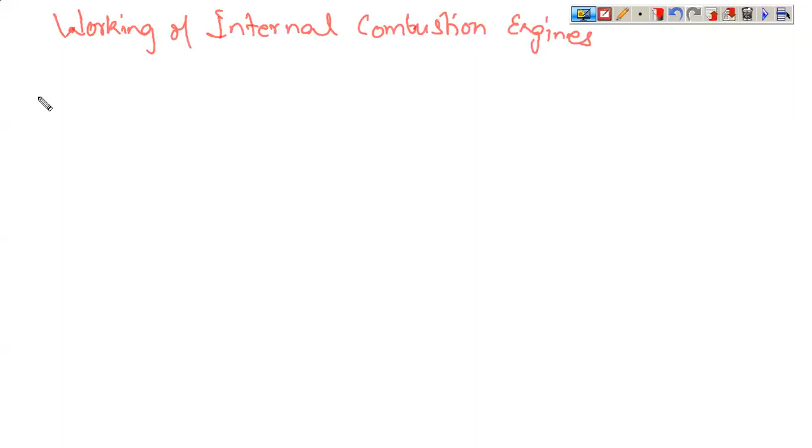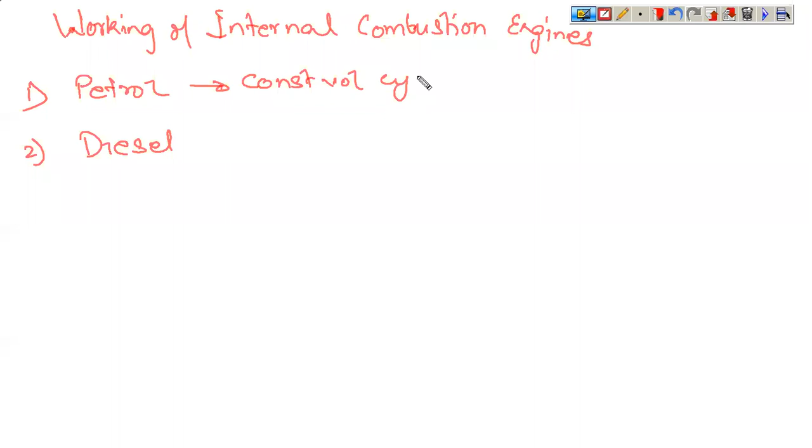Under the classification head, we had studied that there are two types of engines, petrol engine and diesel engine. The petrol engine was supposed to follow the constant volume cycle, and this is known as Otto cycle. Whereas a diesel engine was supposed to follow constant pressure cycle, and this is called as diesel cycle.

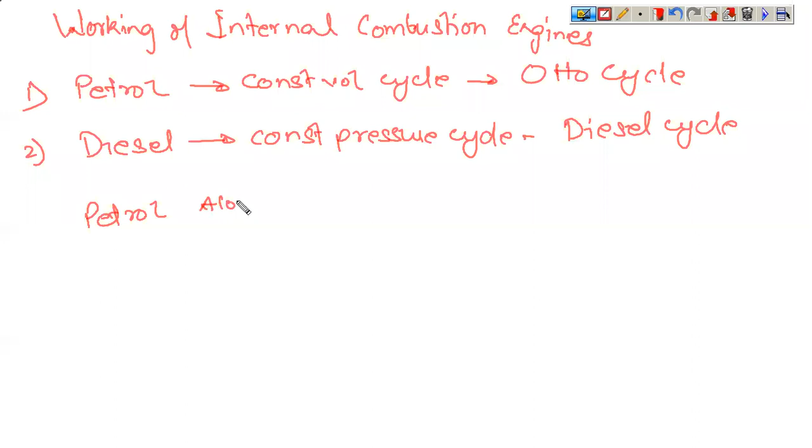Now for petrol engines, they are either petrol alone as the basic fuel, or you have a combination of petrol plus CNG, or petrol plus LPG. These are two basic fuels. And for diesel, we have a single diesel engine. Diesel cannot run on two fuels.

A vehicle running on diesel cannot accommodate two fuels. The primary reason is CNG and LPG follow gas cycles, and these gas cycles are based on Otto cycle only. So with a slight modification in the engine parameters, a petrol engine can be converted into a combination of petrol and CNG or a combination of petrol and LPG.

Whereas a diesel cycle or constant pressure cycle is entirely different from a petrol cycle. The basic mechanism or functioning itself is different. So a diesel engine cannot be modified into a CNG or LPG engine. Another thing you can ask is, what if we put diesel into a petrol engine?

If diesel is used as a fuel in a petrol engine, it will not run the engine, because there is a difference in ignition temperature of petrol and diesel, as well as the basic flammability of petrol and diesel. There is a huge difference, and that difference cannot be accommodated in a petrol engine.

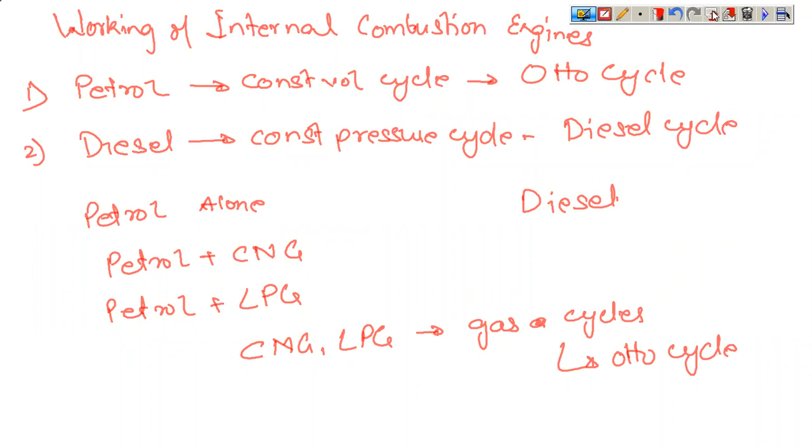So if you talk about petrol engine, let us first take a petrol engine. Petrol engines are called SI engines. SI means spark ignition - these are classifications of petrol engine. Under the classifications, I had told you about SI and CI engines. So SI is spark ignition engines, and diesel engines are called CI engines - compression ignition engines.

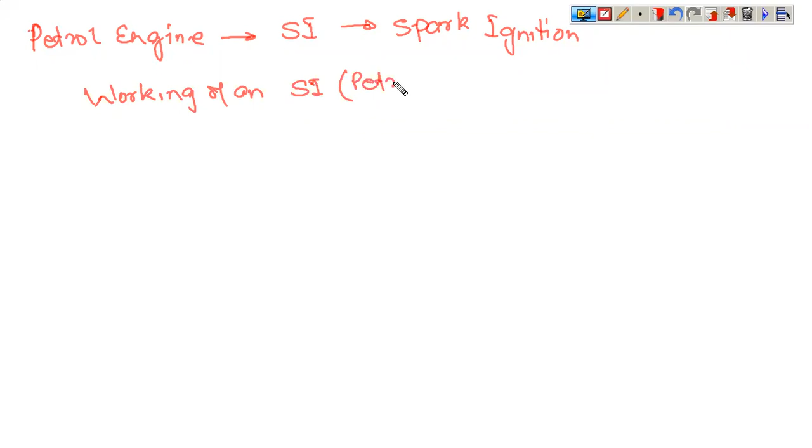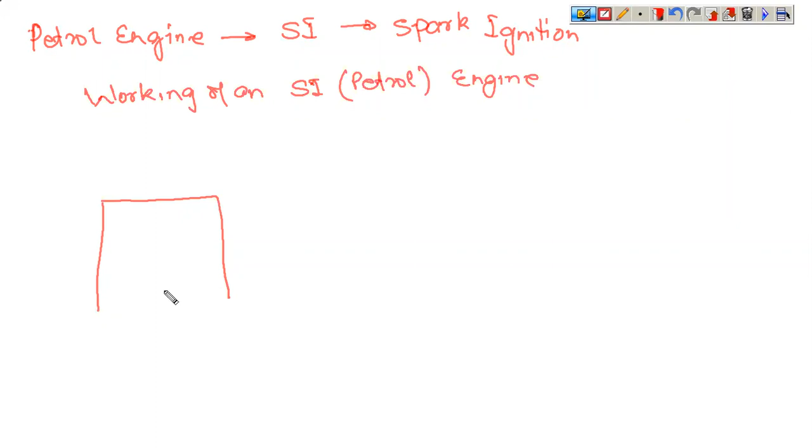So let us first see how a petrol engine works - the working of an SI engine. If you say SI engine or a petrol engine, it is one and the same. So here you have a piston, this is a cylinder, this is a piston. And you have a mixing device located outside the piston cylinder assembly where air and fuel is mixed in a definite proportion and it enters into it.

So through this air fuel mixture in a definite proportion, it enters here, and the piston starts moving upward. Before the piston starts moving upward, this entire volume, or the cc of the engine, is filled up with air fuel mixture. And the piston, when it starts moving, starts compressing the air fuel mixture or gas present inside it.

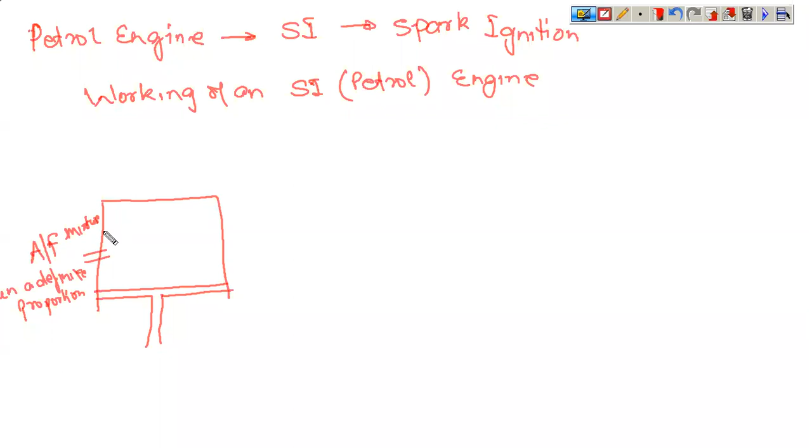So after compression, let us say the piston has reached here. It cannot reach the top of the cylinder because then the volume will be zero - that is not possible because there is some volume, it will occupy some space. So due to this compression, the temperature of the air fuel mixture rises to a certain extent.

At that moment of time, you have a spark plug placed here. A spark is ignited, which leads to the burning of the fuel. Again, you can ask, why didn't we compress it to such an extent that it burnt on its own? If it burns on its own, there will be a sudden burst of energy.

So, to make the combustion controllable, we increase the temperature to a range where it is just about to burn, and the final process of burning or combustion of the fuel takes place with the help of the spark plug.

The spark plug delivers the difference of temperature required to burn the air fuel mixture.

Now, after burning, what will happen? It leads to burning of the air fuel mixture. The petrol gets burnt in the presence of air, and due to burning, the gases will expand, and the expansion of the gases...

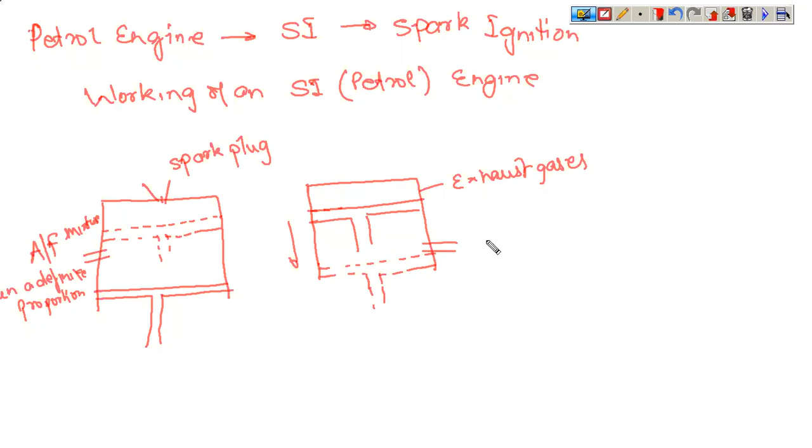after burning, it leads to the piston which was initially here, it is pushed down and it reaches here. Now this entire volume is filled by exhaust gases, and you have an outlet mechanism here which allows the gases to leave the system.

It allows the gases to leave the system, and again a fresh supply of air fuel mixture will enter into it and the process continues. Now the energy required to move the piston up is given by the engine, and this is the expansion stroke where the expansion of gases leads to the pushing of the cylinder piston from the upper end to the lower end, and this is your work output that you get.

Now this work output is sent to the flywheel where it stores energy and delivers it as and when required, which is also useful in running the engine. So this is your complete cycle through which a petrol engine undergoes.

So if you see here, as I told you, there are four processes involved in the working of any IC engine. First is compression, second is heat addition, third is expansion, and the fourth is exhaust. These four processes need to be accomplished so that an engine starts producing power.

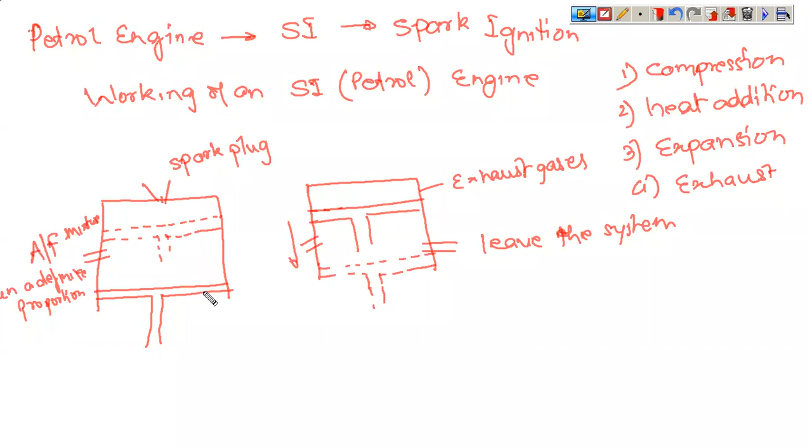So when the piston is moving, the lower part is called bottom dead center, BDC. Why is it called bottom dead center? Because the piston cannot go further below it, and there is a restriction that the piston will not go further below it. So this is called a bottom dead center.

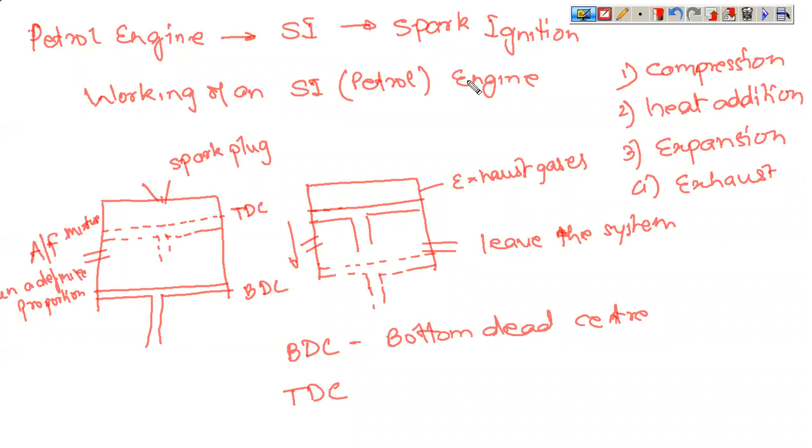This point is called TDC, top dead center. Why is it called top dead center? Because the piston cannot go further above it.

This much amount of volume will be left because this much amount of volume corresponds to a certain pressure, which also corresponds to a certain temperature, which is being reached here. So you need to understand that these are the uppermost and the bottommost positions of the piston.

So in the cylinder, when the piston is moving from here to here, what actually happens is the first process, compression, takes place. Here when the spark is ignited or applied, this is the heat addition, where heat has been added due to burning of fuel, and the burning of fuel takes place.

Now after the fuel has been burned, the gases expand, and the expansion of the gases is the third process, wherein the piston is moved from the topmost position to the bottommost position. And the last one is exhaust, where exhaust gases leave the system from the silencer and are taken out, and a fresh stock of air fuel mixture enters, which allows the cycle to be completed again and again.

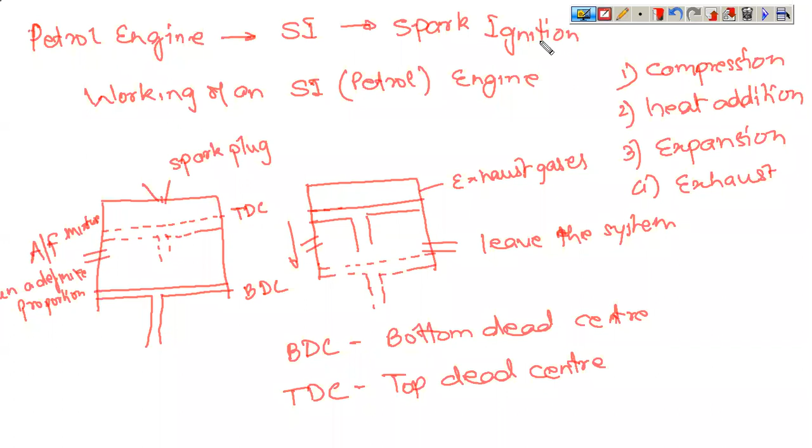Now the next is diesel engines. These are also called compression ignition engines. So in compression ignition engines, what happens is you again have a piston and cylinder arrangement.

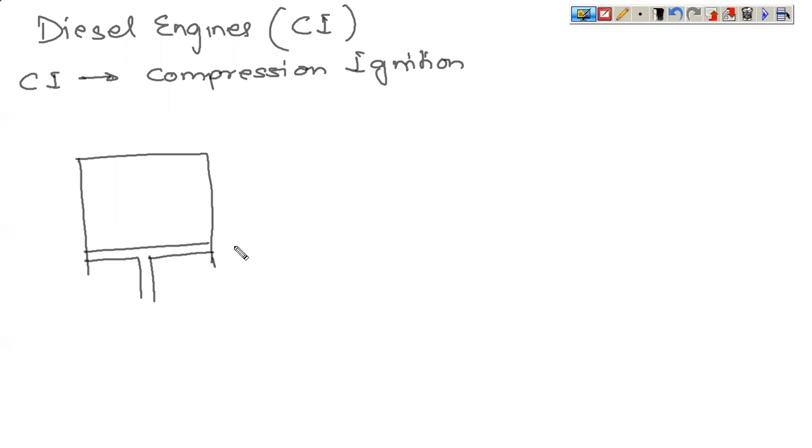So this is the initial position of the piston inside the cylinder. This initial position is called BDC, bottom dead center, below which the piston cannot move.

Now here only air is sucked into the cylinder, and this entire volume is now filled. Let us say it is a 100 cc engine, then this entire volume of 100 cc is filled with air only.

Air that is sucked from the atmosphere passes through a filter where the air is purified of dust particles, sand particles, etc., before it enters into the cylinder, because sand particles will corrode the inner surface of the cylinder. So only air is being sucked into the cylinder, and then the piston starts moving upward.

So air is compressed and the piston reaches here.

This is called top dead center, or TDC. Now this volume comprises only air, which after compression has achieved a higher pressure and temperature.

The amount of compression in a diesel engine is more than in a petrol engine. In diesel, air is compressed to a larger extent. The compression ratio is around 8 to 12 in SI engines, meaning it's compressed to 8 to 12 times the initial volume. In diesel engines, it's around 20 to 25 times. So the volume left over will be smaller compared to a petrol engine.

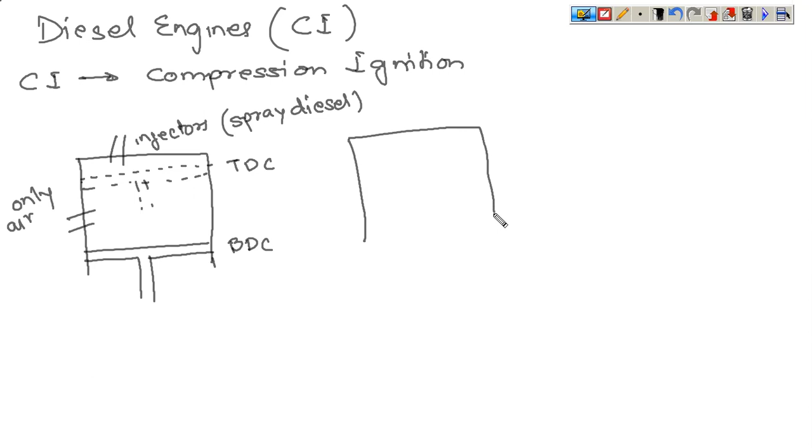This is heat addition. After heat addition, the gases expand. This was the initial position of the piston at the time of burning, and the expansion of gases pushes the piston from its topmost position to its bottommost position.

This is now entirely filled with exhaust gases, and exhaust takes place, removing the gases from the system, completing the entire cycle. In the next cycle, fresh air stock enters the cylinder, gets compressed, diesel is sprayed onto it, leading to burning of the diesel.

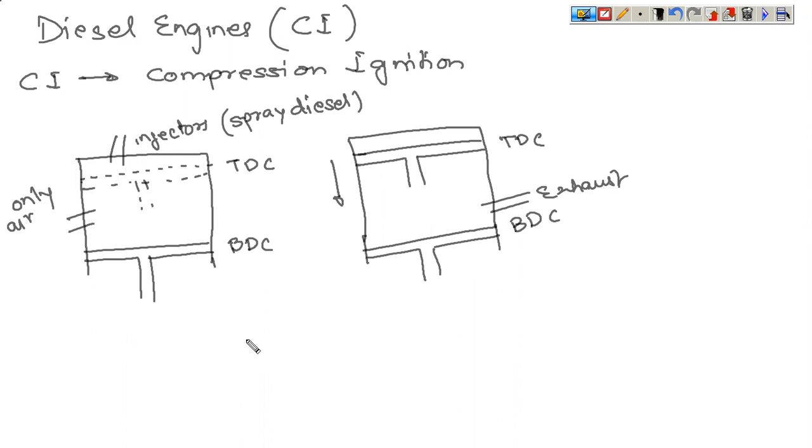The burning of diesel expands the gases, and this expansion pushes the piston from top dead center to bottom dead center. This pushing of the piston from TDC to BDC is the power stroke, and this power is utilized to run the vehicle. Now, again, this is a constant pressure cycle.

It is a constant pressure cycle. When the piston is at this position, it is filled with high temperature, high pressure air. Now when diesel is sprayed onto it, if the volume remains constant, the pressure will increase because you have a limited volume and more matter is being inserted into it.

So when the diesel spray takes place, the piston moves down by a very small amount so as to keep the pressure constant. This is the reason why it is called a constant pressure cycle.

In a petrol engine, the position of the piston was constant when burning takes place. Whereas in a diesel engine, the position of the piston is not constant - it moves down, increasing the volume by a small amount as diesel is sprayed into the cylinder. This is why it is called a constant pressure cycle, also known as the diesel cycle.

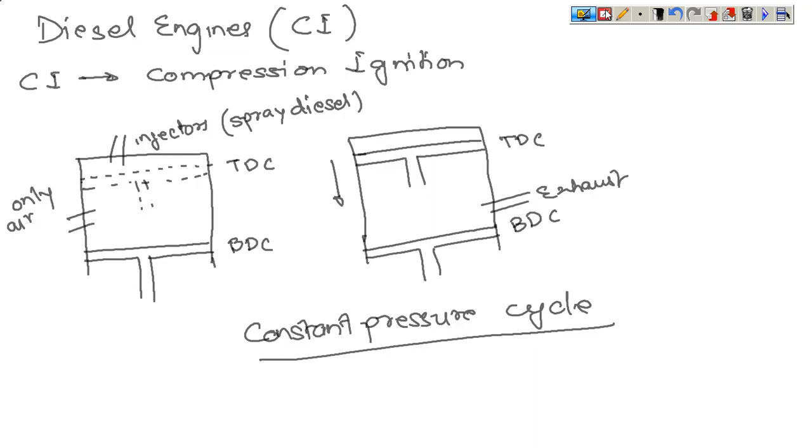Now, two-stroke and four-stroke engines can be petrol engines or diesel engines. Why are they called two-stroke and four-stroke engines?

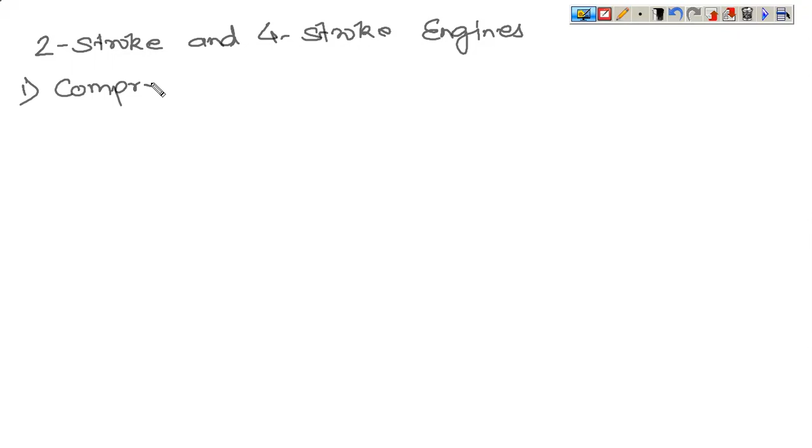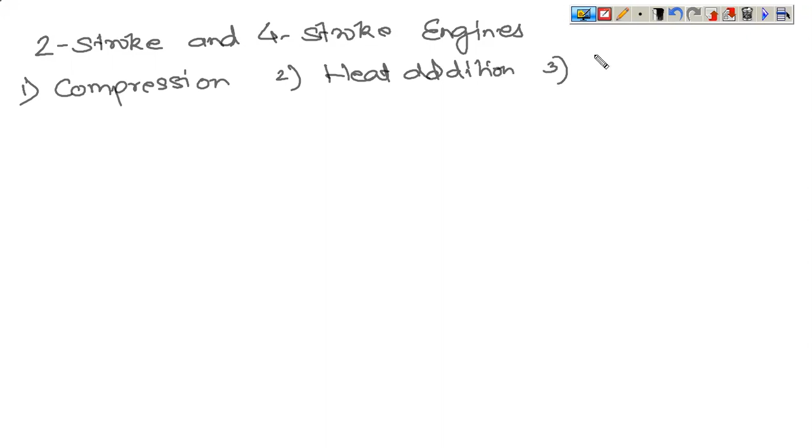Before I start, you can see there are four basic processes: first is compression, second is heat addition, third is expansion, and the fourth is exhaust. These four have to take place in this order only so that one cycle is completed.

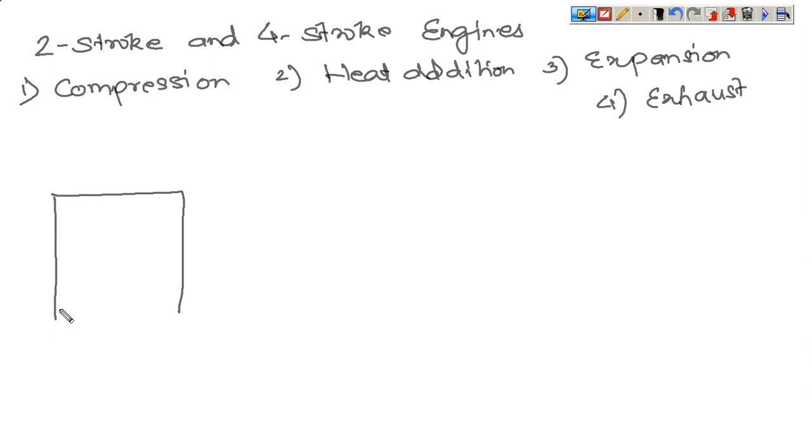So in a two-stroke engine, what happens? This is a cylinder and you have a piston here. Now you have a port here, called a port, meaning an opening - this is called an inlet port. Through the inlet port, air-fuel mixture enters, and as entry takes place, the piston starts moving upward, reaching its final position here.

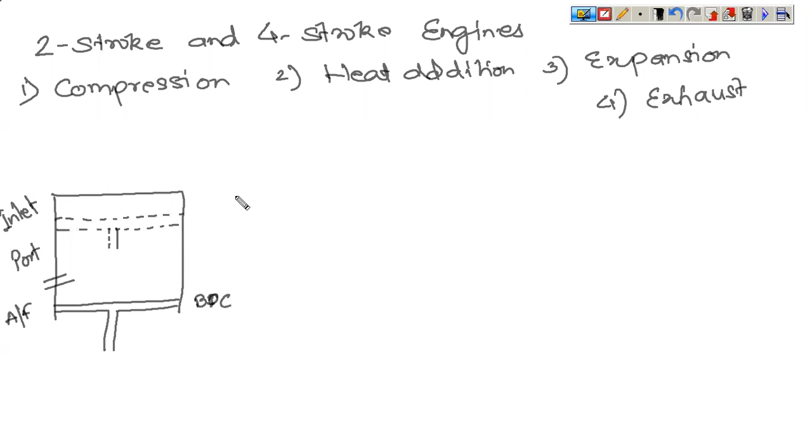So this is one stroke. One stroke means one stroke is the movement of the piston from BDC to TDC. So BDC, this is your first stroke, stroke number one. In stroke number one, the piston moves from BDC to TDC, thereby compressing the air fuel mixture.

If it is a petrol engine, or if it is a diesel engine, it will compress the air to this extent. Whatever the engine is, the working principle for a two-stroke engine is the same: the piston moves from BDC to TDC, either compressing the air fuel mixture or compressing the air, depending on whether it is a petrol engine or a diesel engine. This is your one stroke.

Here, heat addition takes place. In this heat addition, what happens? Either a spark is initiated to burn the air fuel mixture, or diesel is sprayed onto it so that the fuel burns, and the burning of the fuel leads to the production of heat.

That is heat addition. After heat addition has taken place, this is your second stroke. So in the second stroke, what happens? This is your initial position of the piston, and this is after heat addition has taken place. After heat addition, the gases will expand and push the piston from TDC to BDC, this location.

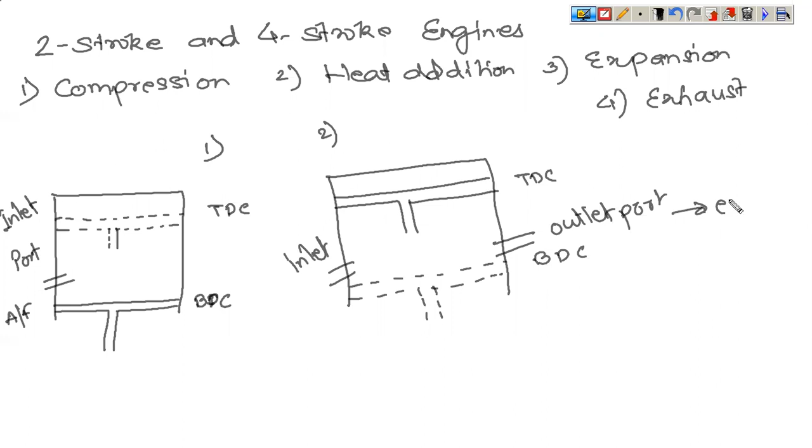So this is your BDC. It has been pushed - this is your expansion. And again you have an outlet port here, and an inlet port here. So from the outlet port, the exhaust gases leave the system, and simultaneously fresh gases enter into the system.

So what happens? The energy required to run this system - one motion of the piston is given by you, and while it comes down, the piston gives back energy which is used to run the vehicle, as well as supply energy to the piston to again perform compression. So this is a two-stroke engine.

A two-stroke engine means one upward and downward movement of the piston inside the cylinder. In the case of two-stroke engines, you have two ports: inlet port and outlet port. Through the inlet port, air fuel mixture or air, whatever is applicable, enters into the cylinder. Through the outlet port, exhaust gases leave the system.

If you see the system, both the ports are open at the same time. So what will happen? There is a possibility that some amount of unburnt air fuel mixture leaves through the exhaust port. There is also a possibility that some amount of exhaust gases stay back in the system and are further compressed. It is a wastage of energy.

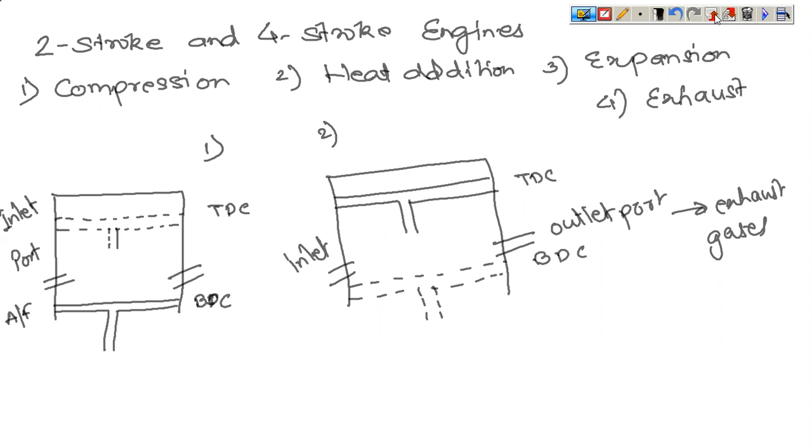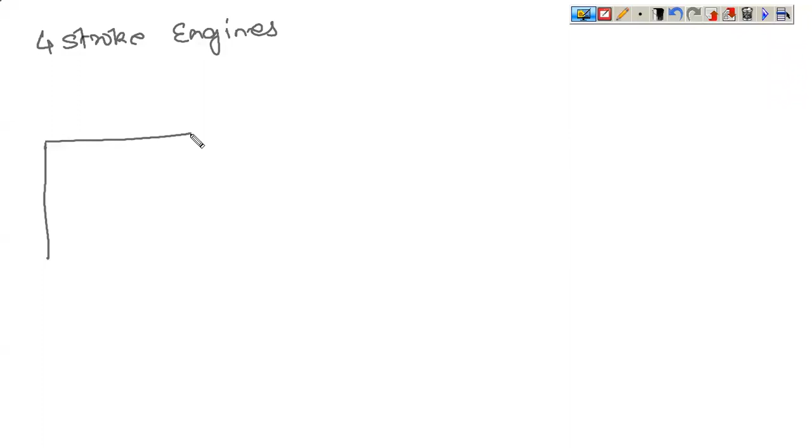So now come to a four-stroke engine. In a four-stroke engine, what happens? Four strokes are carried out. So here what happens? This is the initial position of the piston.

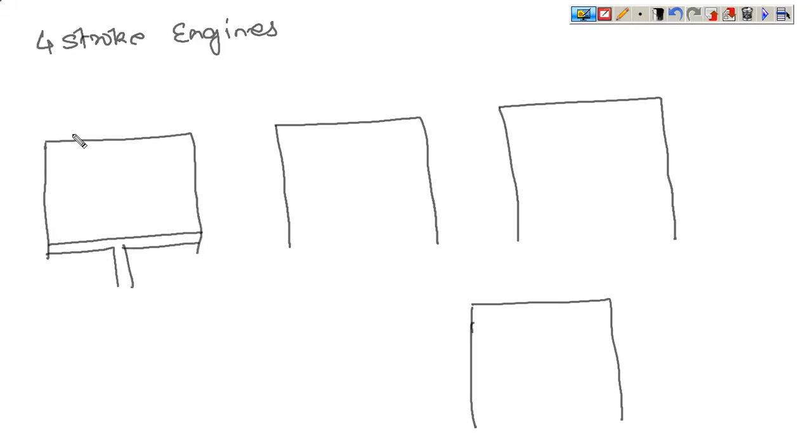You have two valves here. There is a difference between valves and ports. A valve is a mechanical mechanism by which you can control its opening and closing, whereas a port is always open. So these are the inlet valve and the outlet valve.

In the first process, obviously you have compression. In the compression stage, what happens? Outlet valve is closed, and only air in the case of a diesel engine, or air fuel mixture in the case of a petrol engine, is injected into the chamber. Let us say if the chamber is of 100 cc, this 100 cc is filled with petrol air fuel mixture or air only, depending on the cycle being followed. The outlet valve is completely closed.

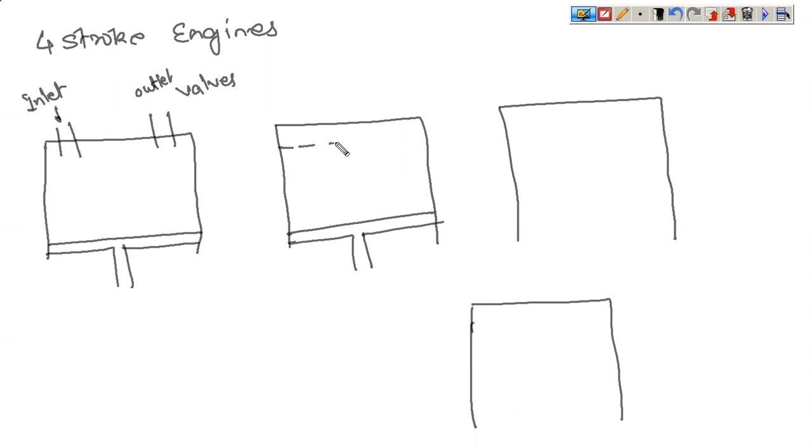After it has been filled by air fuel mixture, the piston starts moving upward, from this position to this position. You have these two valves - both are closed. Here this is closed, this is open... so both valves are closed and compression takes place. That means air fuel mixture or air is compressed fully with both these valves being closed.

Now either a spark is initiated at this moment, or diesel is sprayed, depending on the cycle being followed, which leads to burning. So this is your first compression, and this is your heat addition.

Now third, what happens? After this burning takes place, while the burning is taking place both the inlet and outlet valves are closed, and either diesel is burnt here or air fuel mixture is burnt here. Now again both these valves are closed and the piston moves down.

In the first process the piston is moving up, and in the second process the piston is constant, not moving down. In the third process, the piston is moving down, and when it is moving down, both valves are closed, and the third process, expansion, takes place.